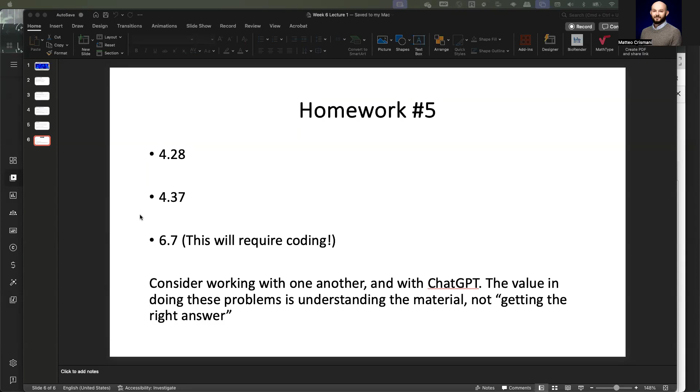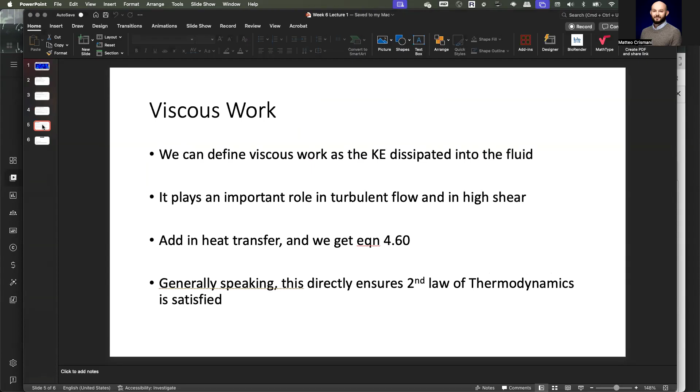See if I have it on my other side really quick. So what I like to do at this point in the class, now that we have all these equations, is to go through them at the beginning of class. Let me see if we can pull them up really quick, so that I don't have to write them a million times. Oh no. Oh no. Disorganized Crismani.

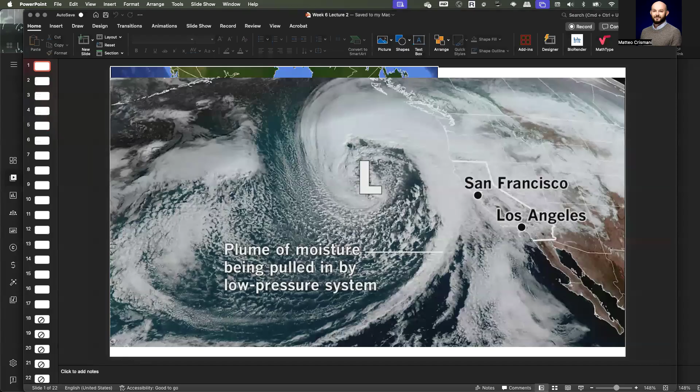Okay. What week are we? Okay. Not week-wise, but material-wise? We're still in chapter 4, 4.4. Following along at home, which I hope you are. We are finishing conservation of energy. So we're going to go a little out of order for the slides really quick because I want to start with just discussing the equations, and then we're going to move back to talking about viscous work.

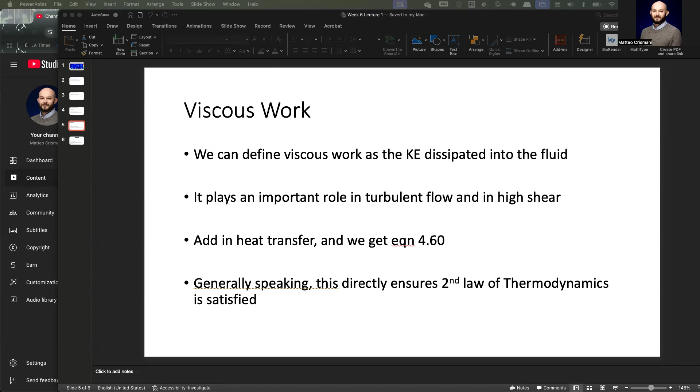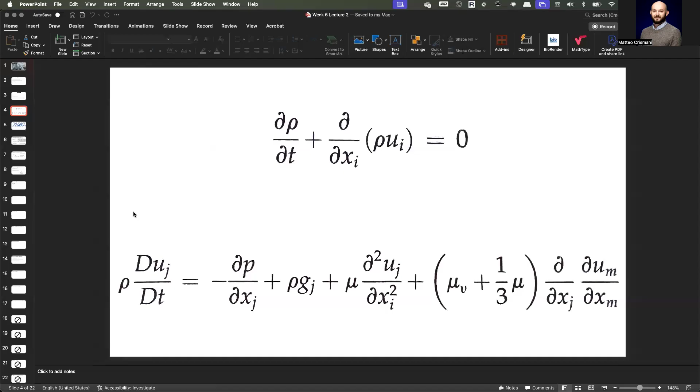So I'm going to put these up on the screen. Can you see those okay? Yes? Okay. So what is this? It's the whole statement. Well, it's saying, well, it's density over time, so it's the change of density over time, and you're looking at the path it takes from a specific force, and it's saying 0, so it's conserved in that system.

Good, but what's conserved? I was thinking momentum of the energy that's put into the system. How is that possible? If there would be energy, how would the energy momentum be equal to 0? Close, almost there. Conserving. Conservation of mass, also called the continuity equation.

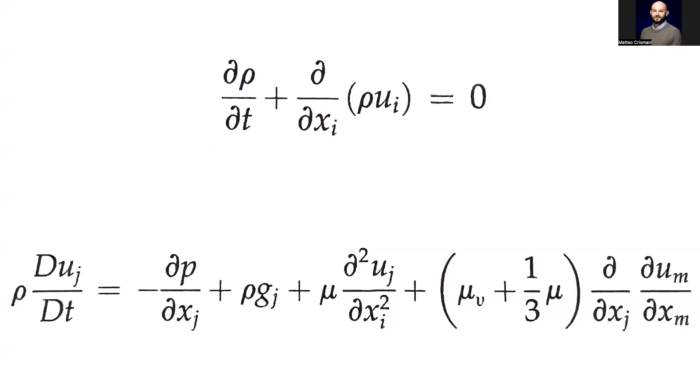What? Who said that? All right. So here we go. Fuck, that's horrible. Dang. Okay.

And this is, we just sort of throw these words together because we can understand how these different terms exist. But when we start to use them in practice, they'll make more sense. Okay. That took a really long time. I'm not gonna redo all that because I want to go back to this other slide really quick.

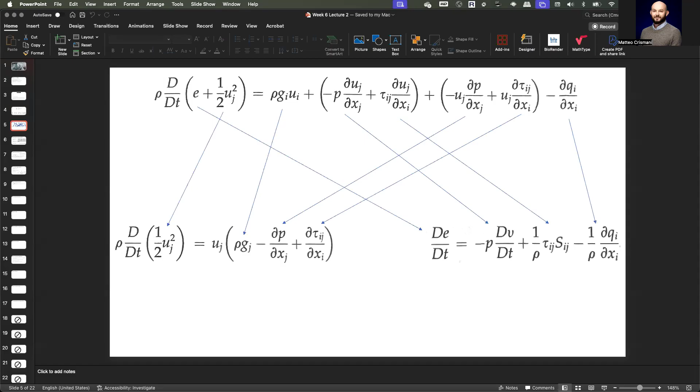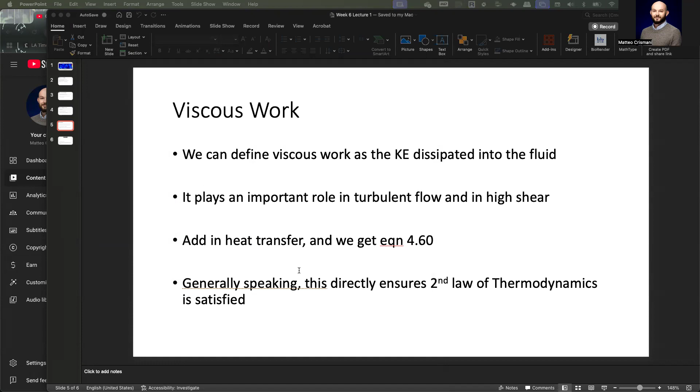Oh shit. Oh my God. Disaster. Okay, wait, there it is. Where'd it go? Okay. So look, I even wrote it down.

All right, here's what I said. We can define the viscous work as the kinetic energy dissipated into the fluid. These play an important role in turbulent flow. So we were talking a little bit about the idea of eddies. These things, they curl around and they take the kinetic flow and they turn it into heat.

You can also have high shear locations. What would be an example of a high shear location in a fluid? And then, so I think you're thinking about geometric shear, and that's certainly correct, right? So shear would be like if it's changing its direction. But I'm thinking about shear here as being two different flows moving past each other quickly.

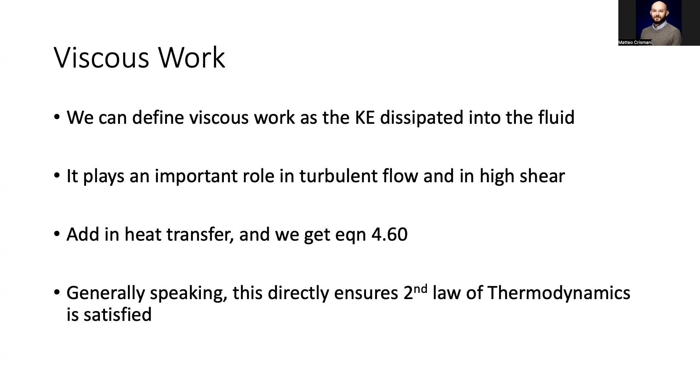Professor. Yeah. Are we gonna be able to cover chapter 8 during this semester? What's chapter 8? Gravitational waves? You understand that that is not for stars. No, but I mean for planets, or is it not astronomical? It's not astronomical at all. Can it be applied? Okay, cool. But everything else we've learned so far can be applied to it, right? Like how you mentioned this can be applied to other stuff.

Oh, yeah. So chapter 8 is gravity waves. We will do those, but in the context of what they were meant. When gravity waves are first talked about, they are the result of a balance between the fluid and the restoring force gravity. So things that are buoyant versus things that are sucked down. So the way they first calculated gravity was by the time it took to stabilize? No. This is fluid dynamics. Comes way after gravity. Gravity comes from 2 spheres that Cavendish watched for a really long time. I think we should do a history of physics class someday, but not here.

Okay. You have times available today? Or no? For homework or for? Oh, right.